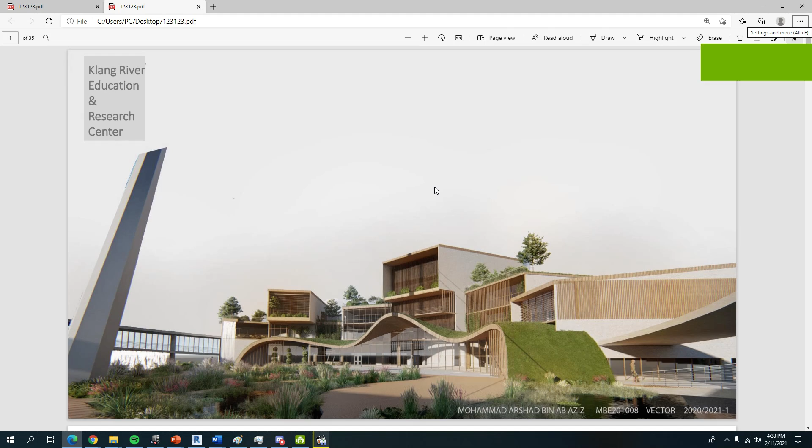I will be presenting about the Klang River Education and Research Center. I will do a bit of introduction of the river in general.

Water, as we all know, is essential and critical for humans because in early settlements, rivers were used for agriculture and later for industry. It is also a source of clean water and home for biodiversity.

But because of urbanization plus human activity, water has been contaminated, degraded, and polluted, progressively becoming more critical and common. This issue impacts human health, biodiversity, and even the economy of some communities. Sources of river pollution are mainly residential, industrial, and agricultural.

As we see from this data, in Malaysia from 2008 until 2017, the number of clean rivers has been steadily decreasing. In 2017, only 46% were clean rivers, 43% slightly polluted, and 11% polluted.

One of the most famous polluted rivers is Klang River. Klang has been settled by humans since ancient times, with evidence dating back to the Bronze Age, and is also known for tin mining activities and as a main transportation route during those days.

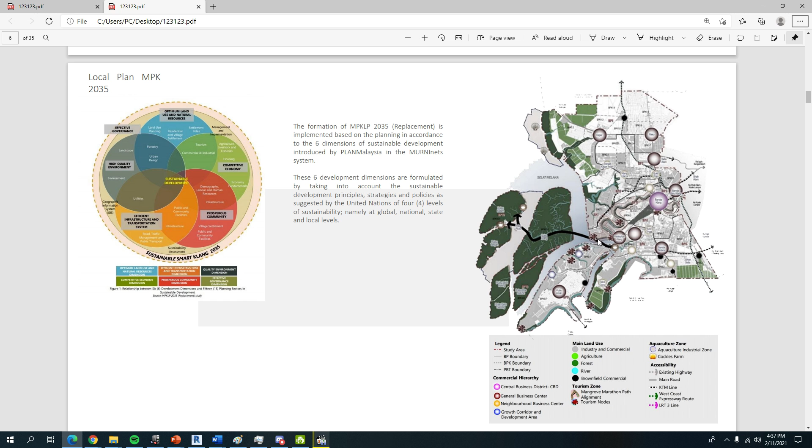For the future development by SMG, the master plan has 5 points: a mangrove point, a community river park, grand bazaar, cultural village retreat, and Pengkalan Batu.

The master plan aims to establish Klang as an eco-smart city to spur new sustainable social and economic growth along Klang River.

This is the Taman Pengkalan Batu, which has 5 zones: a rewarding garden, flora and fauna garden, retreat and relax garden, hyperactive garden, and food and beverage garden.

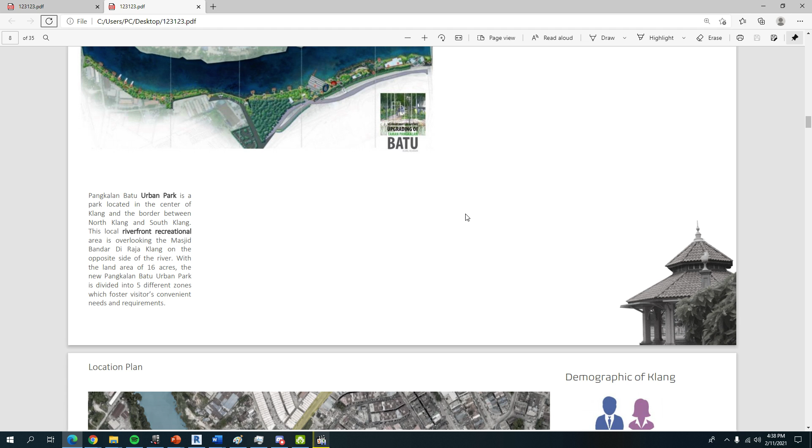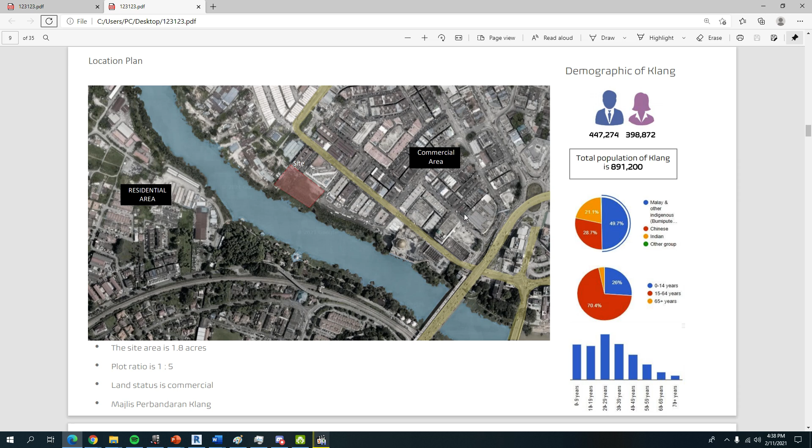The site is located at Klang City Centre, with a site area of 1.8 acres, facing directly the Klang River, and also facing the opposite of Taman Pengkalan Batu.

There are a few landmarks nearby, including Masjid Bandar Diraja, Majlis Perbandaran Klang, and the Klang City Square.

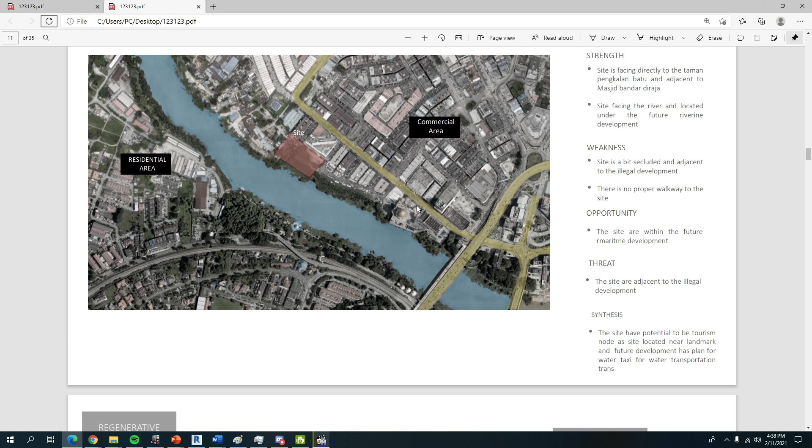For this framework, the issue is that because of urbanization, the river has become polluted and degraded. There is a devaluation of the river, as the community does not have appreciation or awareness toward it.

The objective is to educate and promote awareness about river pollution, and to utilize the river's potential and revitalize the Klang River. The strategy is to innovate and integrate a water purification system with architecture, providing a communal space and programs that interact with the river.

The aim is to educate about river sustainability, promote awareness regarding environmental pollution, and provide recreation space for community interaction with the river.

The client will be Nahrim, known for research on development of water resources, together with Menteri Besar Selangor Incorporated.

The users will be the local community, non-government organizations, and also tourists, for ecological tourism. The Klang Education Research Center will have 3 programs: the environment awareness program,

which is to educate and promote awareness about the river; an environment study program, to study the pollution and propose solutions for it; and a communal engagement program, to provide a communal space for community interaction with the Klang River.

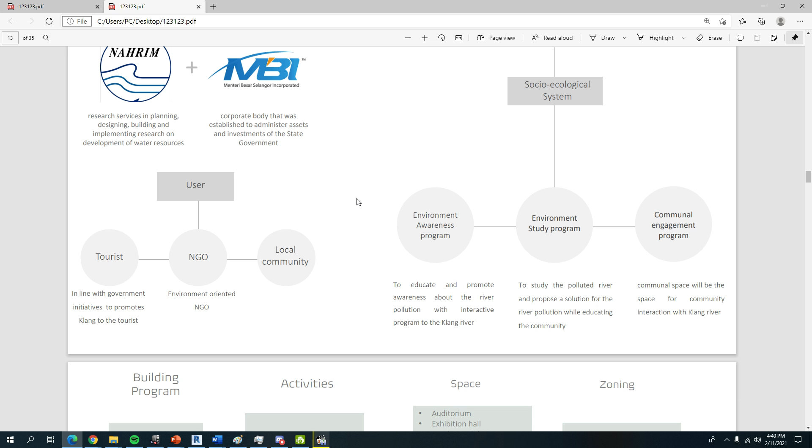The program will include the Environment Education Center, zoned as public; Research and Development, zoned as private and semi-public; and a communal space, also for public use.

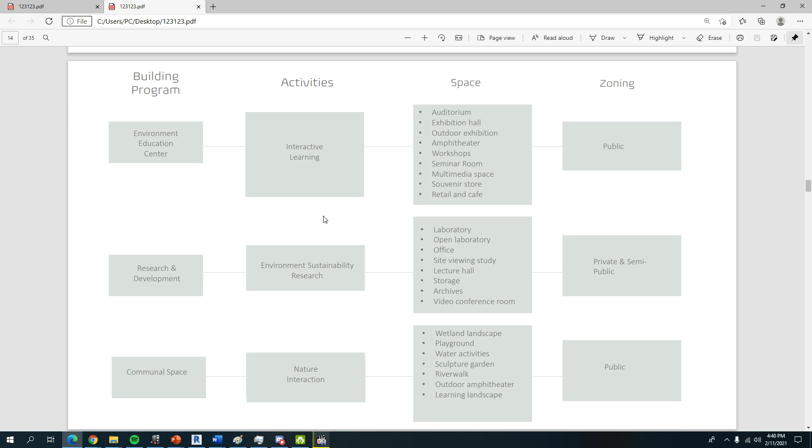The design theory is a socio-ecological approach, which redefines architecture that grounds social needs for food, water, energy, and health within the biophysical capacity of the surrounding environment at a relevant scale.

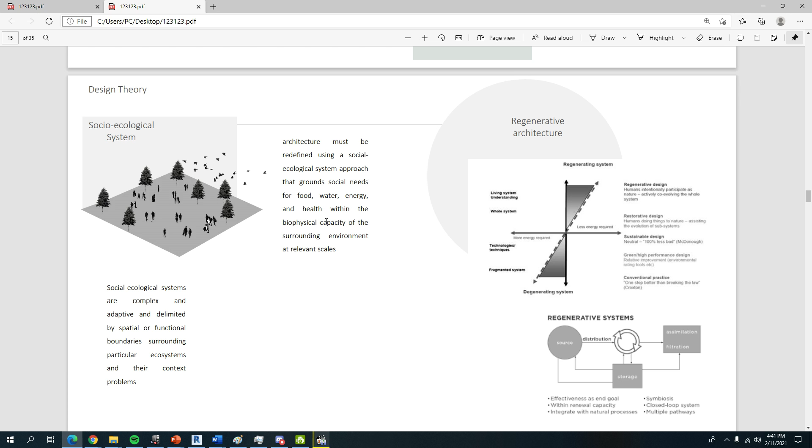The socio-ecological approach is closely related to regenerative architecture, where regenerative design means humans intentionally participate in nature and actively co-evolve with the whole system, creating a symbiosis between nature and human.

The design strategy used will be constructed wetland, implemented because it's chosen as a river water purification system due to low operating costs, ease of maintenance, no secondary pollution, and ecological and economical benefits. Three types of constructed wetland will be used: a floating treatment wetland, a vertical flow constructed wetland, and a horizontal subsuperficial flow constructed wetland.

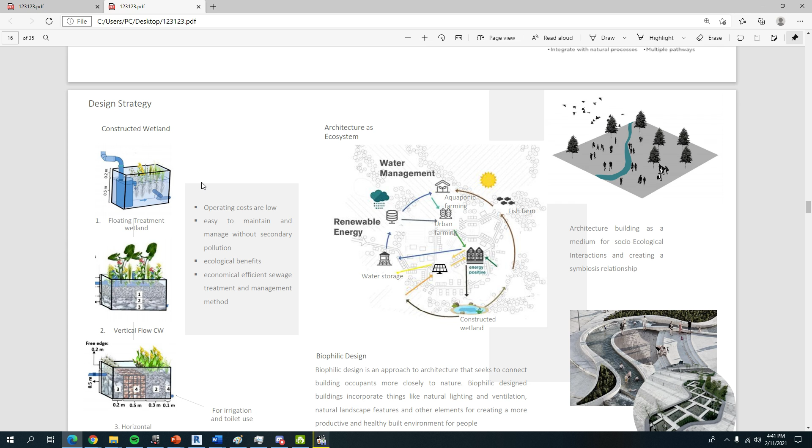Another strategy is to create architecture as ecosystem, with a few programs in the building itself to create a closed loop or closed cycle. Biophilic design will also be implemented, which is an approach to architecture that seeks to connect building occupants closely to nature, making the architecture a medium for socio-ecological interaction and creating a symbiotic relationship with nature.

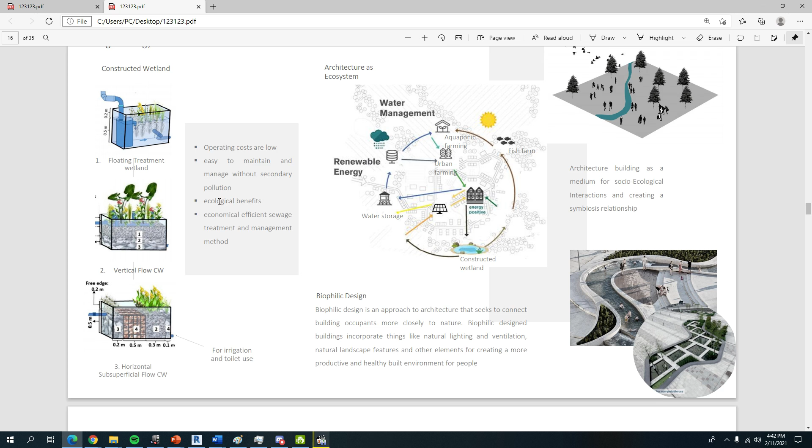So the form development will be a solid block. The solid form is pushed to the back, away from the river, because that area will be used for a constructed wetland.

An extended bridge is used to have a live view of the river, a view of the constructed wetland, and a view of the interceptor. The interceptor is a machine that cleans the Klang River.

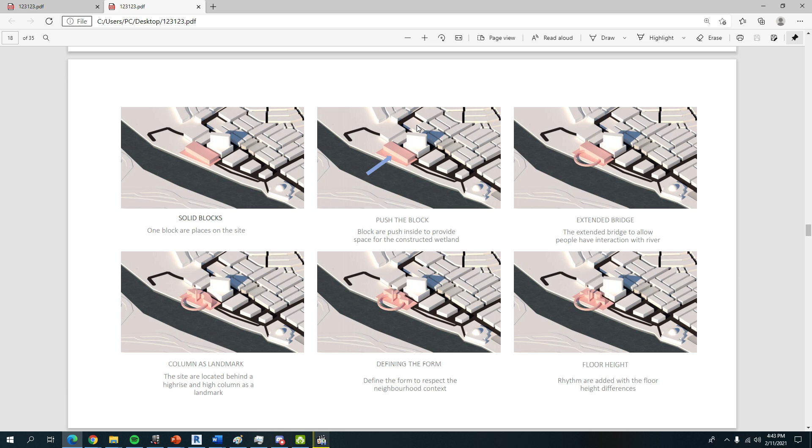There will be a column as a landmark, a tall column that supports the bridge. This column will be the landmark for this building, redefining the form to respect the neighborhood context and adding rhythm.

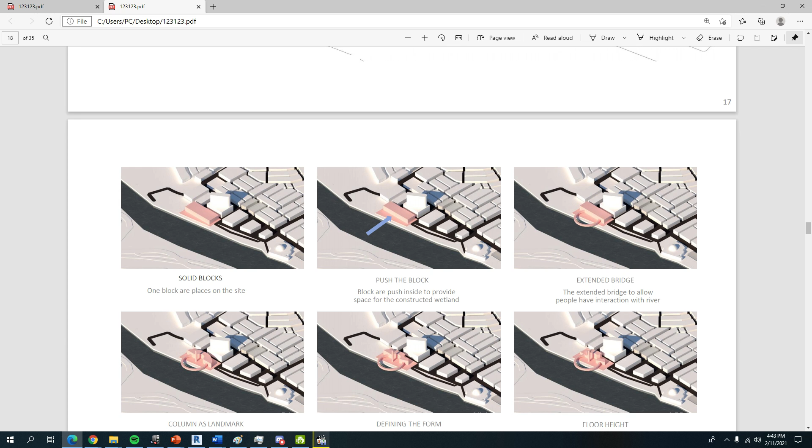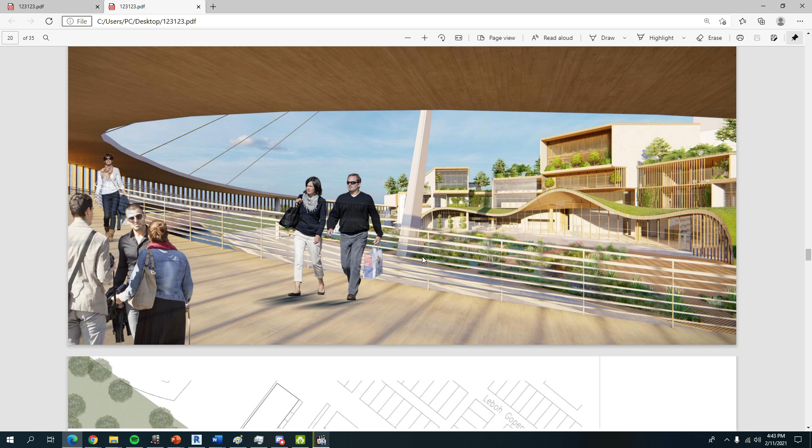This is a perspective of the building. This is the view from the bridge, where you can see the constructed wetland with the building. You can also see the river and the interceptor, the machine that cleans the river.

This is a site plan. For the ground floor, as they enter the building, there will be a welcome by the paludarium on the right side and an aquarium on the left side. The aquarium will be home for local fish.

As they go through, there will be a wide, open exhibition hall with a big window that can see through the wetland park and the river. The big glass will blur the line between indoor and outdoor.

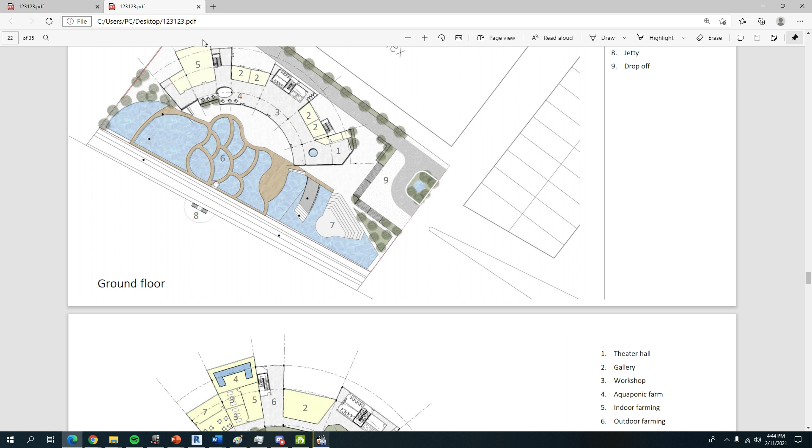They can also choose to go inside the building or use the bridge for a closed loop journey. This area will be for the exhibition hall.

The first floor will be for the theater hall and a gallery. There will be a gallery about the environment.

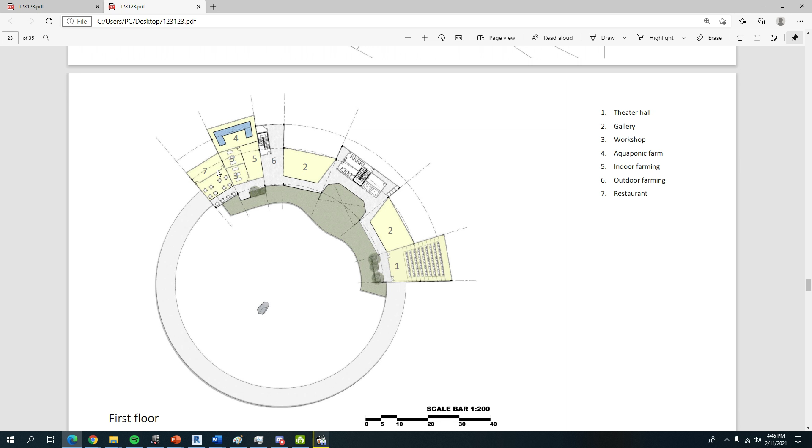This area will be for farming, with outdoor farming, indoor farming, and aquaponic farming, along with a workshop for it. There is also a restaurant that will use local ingredients from the farming.

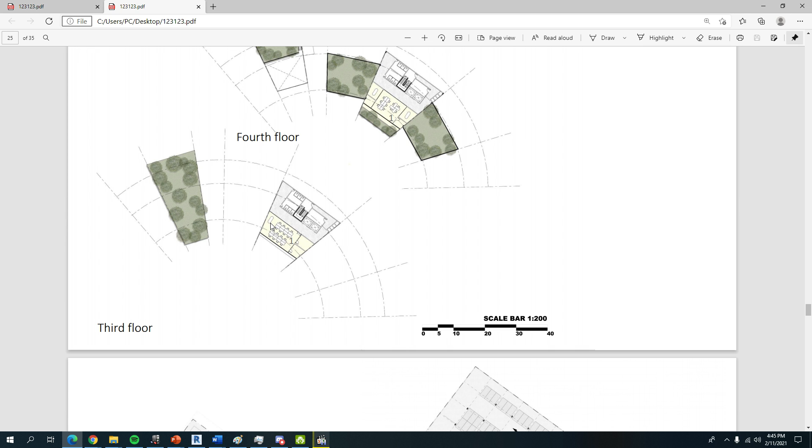This is the building's ecosystem cycle. From the river, water goes through the constructed wetland, so the clean water can be used for the fish farm, aquaponic farming, and farming irrigation. The result can be used in the building, for the restaurant, and the clean water from the constructed wetland can be stored and used for irrigation and aquaponic farming, then used back in the building.

For the building, the grey water can be cleaned by the constructed wetland, creating a closed loop or closed cycle.

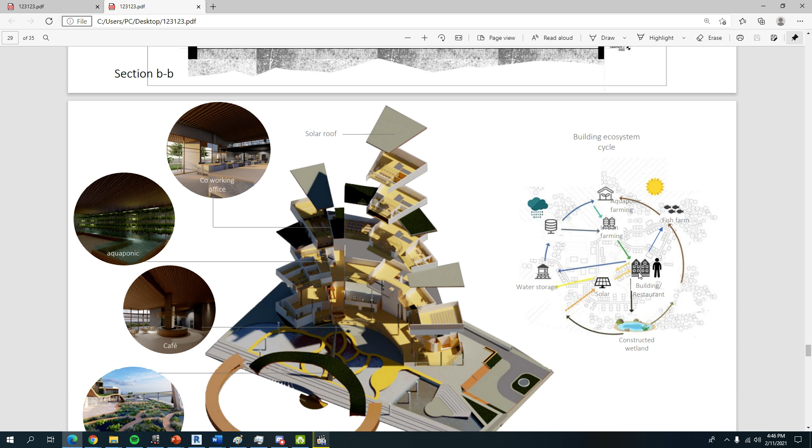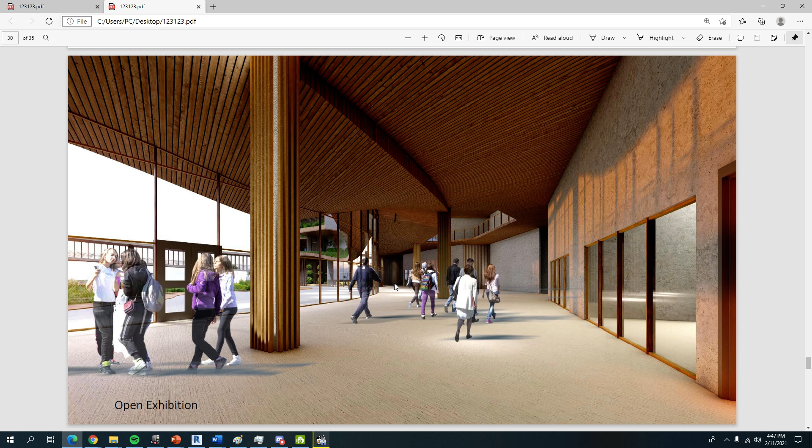This will be explored further: there will be co-working offices, aquaponic areas, a cafe, and a wetland park. This is a view of the open exhibition, where you can see the wetland park and the river, with a big glass that blurs the line between indoor and outdoor.

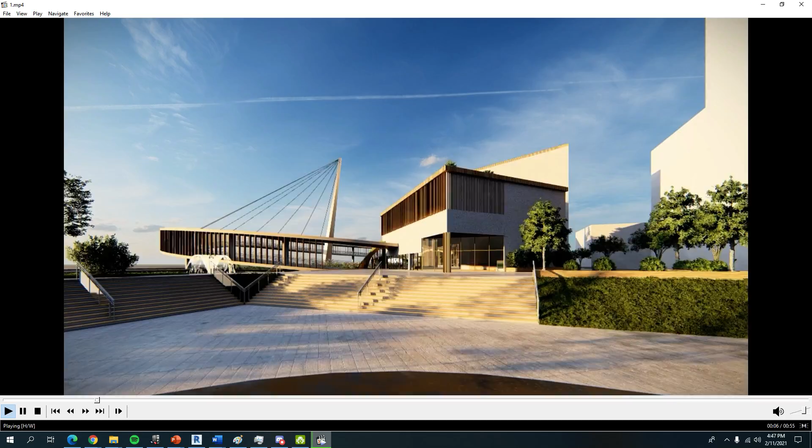This is the view from the wetland park to the building.